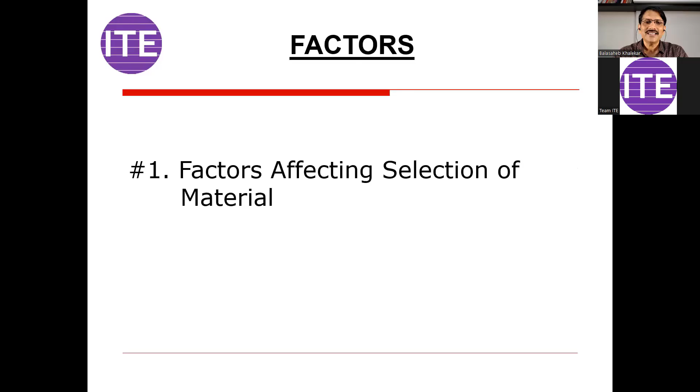So the first point is strength. As a design engineer, you have to visualize the various types of failures. For example, I'll give one example: suppose you are in the tool design department and you have to design a tool like a plastic mold.

That plastic mold is mounted on the machine plate, so you have to design some fasteners, like the size of the screw or bolt. So which type of failure will be there? For a bolt, it will be a shear failure. So when selecting the right material, you have to visualize and understand the type of failure, and as per that, select the material as per the required shear strength. Shear failure means shear strength.

Similarly, you have to visualize the functioning of the part and then decide the strength of the component. So when you select any material, you must know the various properties of material, like tensile strength, compressive strength, shear strength, torsional strength, and so on.

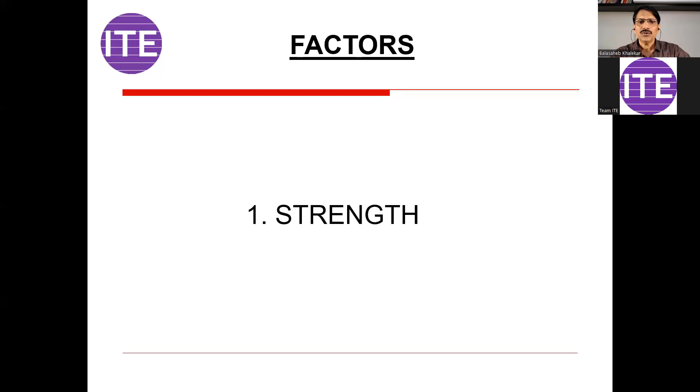Coming to the second point, accuracy. As a product design engineer, you have to finalize the tolerance value or accuracy. There are three terminologies: accuracy, tolerance, and quality. They are very similar in nature. So if the accuracy you want is say 5 micron, then you have to select a suitable material.

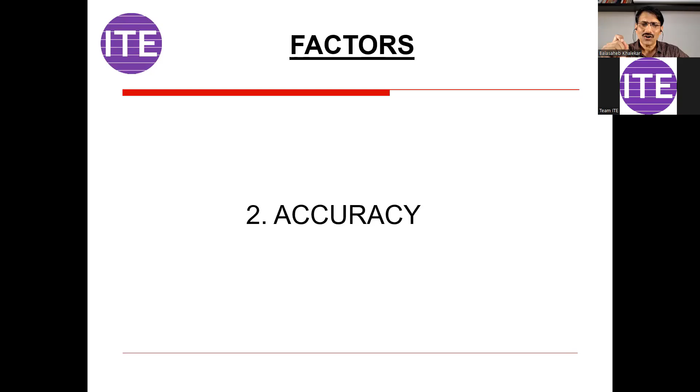You cannot go for wooden material or thermocol material, even though they are engineering materials. There are many materials available, so in such cases, if you have to go for 5 micron accuracy, definitely the choice will be steel or aluminum, meaning metals.

Then coming to the third important aspect, as Taufik explained, cost. And cost should be a parallel thinking. Here I want to give you one very important interview question, you can note it down: how will you reduce the cost of my product? That is a general question asked during interviews, and there are many answers to this question.

One way to reduce the cost is to change the material of the component. You can change the process, go for simplification of design, minimize the number of components, even delete a component, or change the thickness or size for a compact design. There are so many aspects to how you can save the cost of your product.

And cost should be a parallel thinking, meaning whatever activity you are doing right now, whether as a product design engineer, quality engineer, or production engineer, always think how I can reduce the cost of my product. There are various ways, so give this benefit to your company and ultimately to the customer, and don't think about how much effort you are putting in. So cost is a very important aspect.

If you are not sure about the cost, today I'm going to share the rates and the current market situation with you. You can take help from a purchase engineer, since he is there in the market every day. So before finalizing your drawing, go to him, show your drawing, and ask if the specified material is okay. He may give you a good suggestion, saying don't provide this, there is cheaper material available in the market with the same quality or strength.

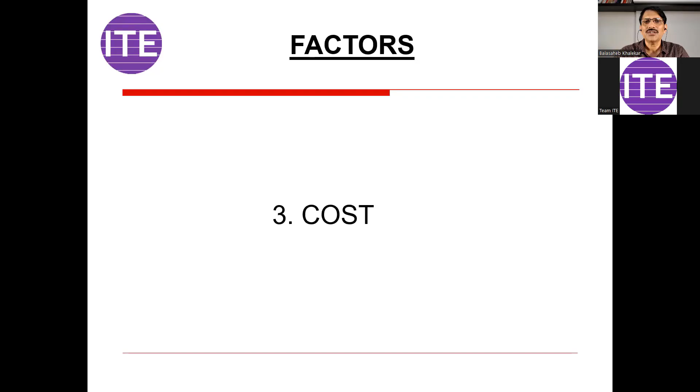Coming to the next point, that is quantity. How many components you want to produce? As per that, material will change. If you are in R&D and have to go for prototype activity, meaning you are not sure about the finalization of the design, you can go for a soft tooling material. In case of dies and molds, there is a concept called soft tooling. If the design is not freezed and trials and errors are required, you use soft tooling material and conduct trials. If found okay, then you finalize the design and tooling. So as per that, you have to go for different materials.

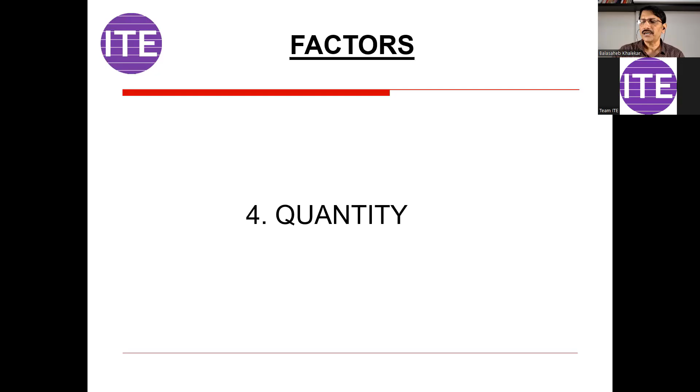Coming to the next point, that is complex geometry. Why is this point very important? When you are designing a product, how you provide the shape is as per the function and the requirement of your customer. There are various aspects of design. Sometimes you may have to go for a complex shape, like in case of engine head, manifold, gearbox housing, or engine block. The shape has to be critical because there are so many functions you have to achieve. And when you design your product, there should be parallel thinking about how you are going to produce this component. So if the complex part is there, then as per that you have to select the material.

And there is again a wide range of materials. So if the complex geometry is there, like engine block or engine head, then you have to select the material which can be processed further. There are many points you have to consider simultaneously. One thing is that you are selecting the material, but at the same time you should have visualization of how you are going to produce this component. That point also we are going to study right now.

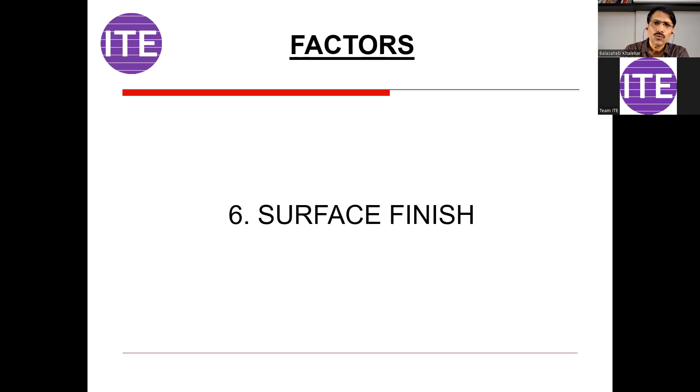Next point is surface finish. What is your requirement? If the component is aesthetically very important, you may have to go for triple triangle or even 4 triangle surface finish symbol. So if you have to achieve that symbol, the same material should be selected which will produce that surface quality. In case of steel, you will get better surface finish compared to cast iron. Even aluminum is better than cast iron. Then cast iron is better than rubber, for example, and rubber is better than wooden. That way you have to consider the point.

Coming to the next point, that is size of the part. Imagine the size of the part is say 2 gram or 3 gram, then there are some limitations for the material to select. Again visualize the job size of say 10,000 mm, then again the material limitation will be there. Not all component materials can produce such huge components. So that way limitations also you have to consider.

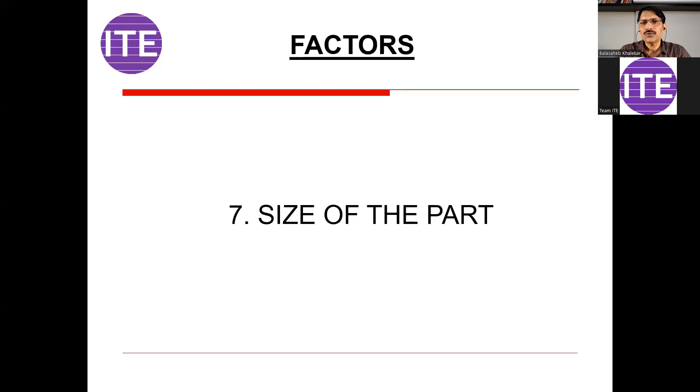Coming to the next point, machinability. Now this part is related to machining processes. So if you consider cast iron and steel, which is having better machinability? Can you type in the chat box? There are many design engineers I can see in this room. If you have to machine cast iron and steel, which is giving more machinability? I want to see your answers.

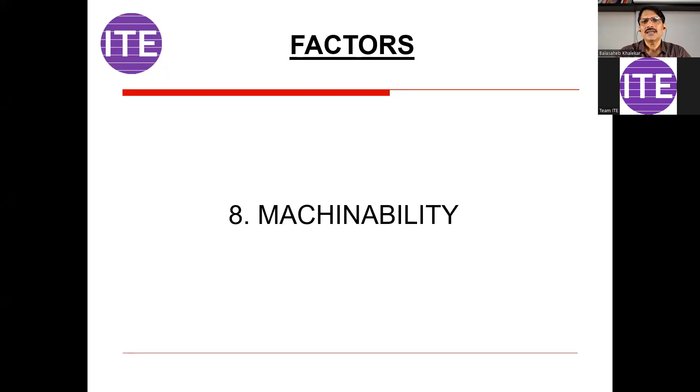Yes, Kunal, absolutely correct, very nice. Thank you, Alok. Thank you, Ashim. So machinability you have to consider. If machinability is good, that means your machining time will be reduced and your cost can also be reduced. That way we have to think.

Coming to the next point, ease of manufacturing. Ease of manufacturing means DFM, design for manufacturing. Here I want to give you an example and you can answer this question. Imagine there is one plate, the material is say steel material, and there one cavity you have to create. The length of the cavity is say 10 mm, width is say 2 mm, and depth is say 7 mm. So how are you going to manufacture this?

Can you type in the chat box? There is one plate, the length of the cavity you have to create is 10 mm, width is 2 mm, and depth is 7 mm. So how are you going to create that cavity in that machine plate?

Alok says drilling, Kunal says milling, laser cut, Vinay says milling. Okay friends, nice attempt.

But friends, just imagine when this is the cavity, if you are going for drilling, what is the minimum drill bit size you can get? That machining knowledge you have to acquire. And why I'm telling you this is because I want each one of you to work in the industry independently, without taking help from anybody. The day you achieve this, you will not remain a design engineer, you will become a project leader, you will become a manager. If you show ignorance in the company, people may take undue advantage.

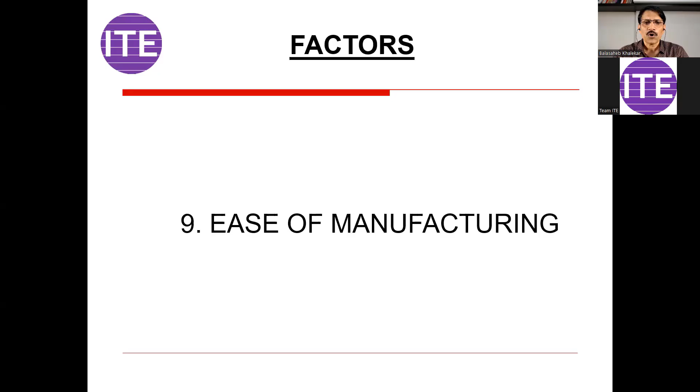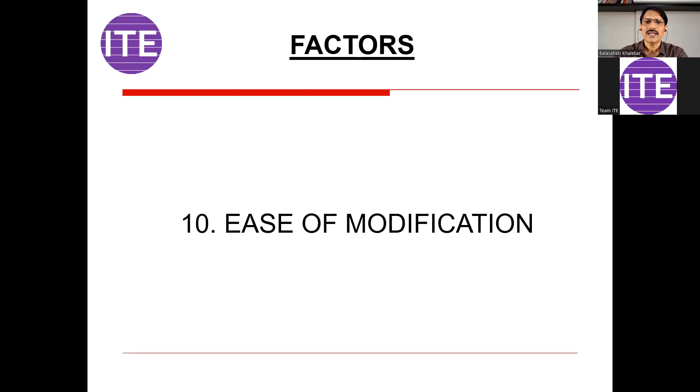Next point is ease of modification. As a design engineer, you must have observed that many times changes come as per the customer, or sometimes because management is not happy with the design. When you have to change the design, whatever material you select should have the flexibility to accommodate those changes in the same parent body. If not, you may have to go for insert fitting, welding, or other processes which may not give a proper feel, and the customer may not be happy. So you have to select a material which has that flexibility.

Next is weight. Sometimes weight is a constraint for the functioning or capacity. For example, a machine can handle only a particular weight of the component, so in that case you have to change the material. Another example is a car: over the last 20 years many components are using lightweight materials, even carbon fiber, as we explore different possibilities. The reason is that reducing weight gives a benefit to the customer, because fuel economy improves, or the cost of the product is reduced.

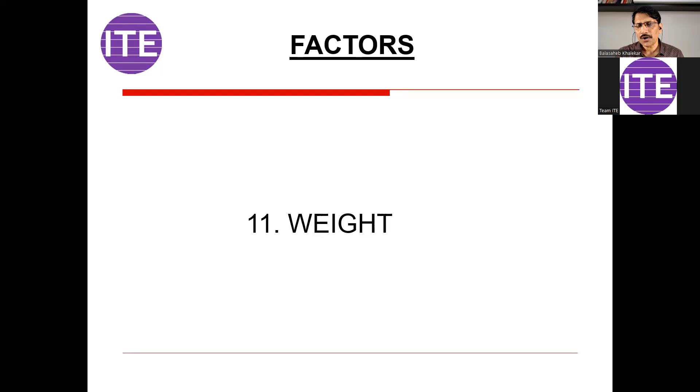That is the benefit. Next is the life: what is the life you want to achieve? This is one input for a design engineer when designing any product or tool. If you don't have this input, you can ask your customer what life they want. As per that, your material selection will change.

Next point is availability. This is not a technical point, but you have to consider it. Sometimes you attend seminars or webinars and learn about a material, and when you apply that on the drawing and release it, the purchase engineer will say this is not available in the market. So when selecting material, always cross-check with market availability.

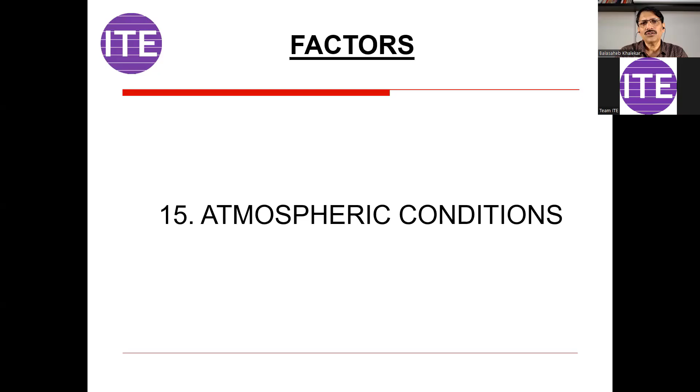Next point is working conditions: what is the temperature, what is the pressure, what load is coming on that particular product? As per that, you have to go for the right material. If the temperature is very high, there will be limitations for plastic or rubber material. Also consider atmospheric conditions: if you are designing a car, you have to consider various temperature variations, since that car can be used in Jammu and Kashmir, Rajasthan, or Tamil Nadu, or sometimes you are designing a vehicle for export quality. So as per that variation, you have to understand the effect on the material and select the suitable one accordingly.

Next important point is manufacturing process. Very important - when you are designing a product, there should be parallel thinking about how you are going to manufacture this component. For a particular material, I can show you this with an example. I have one component with me, made of aluminium. Can you type in the chat box how this component is manufactured, what is the manufacturing process? I want to see your answers.

This is the component you want to produce. This is a manifold of a two-wheeler. Let's understand how this component is manufactured.

Yes, Nilesh, absolutely correct, very nice. Thank you, Alok, absolutely correct. Yes, Vinay, awesome. Anil Kumar, perfect answer.

So this is produced by die casting process. If you say casting, there are many processes available like die casting. In die casting there are processes like low pressure die casting, high pressure die casting, gravity die casting. Again in casting there is sand casting also. So out of all these processes, which is that specific process? That is die casting, right?

In die casting also, there should be a precise answer. So this component is produced by gravity die casting process. Very nice, thank you for this.

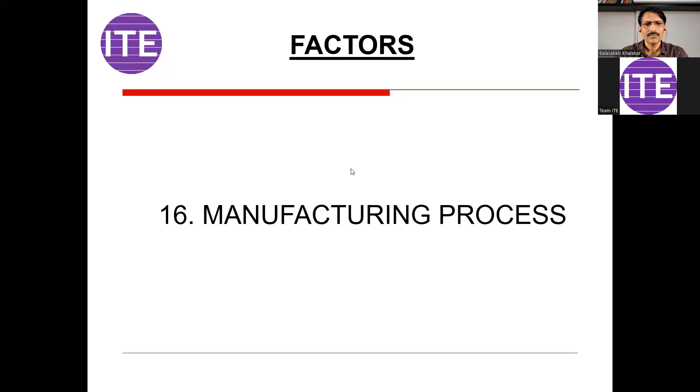Let us understand other aspects. This is one important aspect I want to explain to you. You have to just focus on 5 materials, that's it. Whatever field you are working in right now, as a quality engineer or production engineer in automotive industry or tooling industry, just focus on these 5 materials.

What you have to study, you start from the density of material, for example. Here's an important question generally asked during interviews, you can note this down in your notebook. Draw one cube, dimensions 100 mm by 100 mm by 100 mm. Material is cast iron, density of cast iron is say 7.2 gram per centimeter cube. Find out the mass.

Drawing I have given, that is a cube. Material I have given, find out mass. This is a frequently asked question during interview, and not just for interview. In day-to-day life you have to find out the mass. Of course softwares are there, but if you are not in front of your software or computer, you are at remote places, you should be able to do this activity right from raw material procurement up to dispatch. This is one element which is very, very important.

So why only 5 materials have I specified? Take any industry, say for example car manufacturing company. Just visualize the body components. Body components are produced from steel material. Dashboard of a car, the material is plastic. Tires, oil seal, belt, the material is rubber. Piston, clutch housing, gearbox housing, the material is aluminum. Engine block, material is cast iron, right?

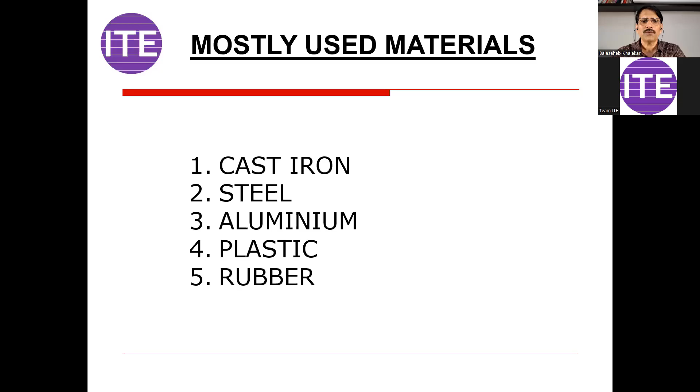So one by one we'll understand this. First material is cast iron. If possible you can note down all these aspects. I will not prefer you taking screenshots. Why is it like this? Because when you take a screenshot, there's a high probability that you will not see that after this webinar. And when you write this - writing, one time writing means 10 times learning. That is the ratio we understood in our school days. So the same thing applies here.

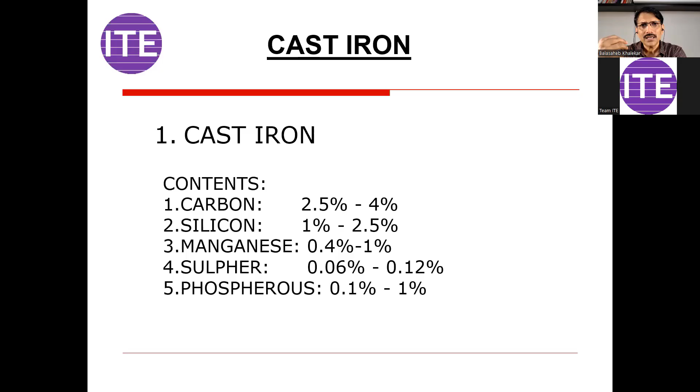So carbon percentage 2.5 to 4%, silicon 1% to 2.5%, manganese 0.4 to 1%, sulfur 0.06 to 0.12%, and phosphorus 0.1% to 1%. Now this may change slightly, this is just to give an idea about the contents. So you must know which are those important elements in cast iron. And at the same time, suppose if you add phosphorus in cast iron, which properties you are going to achieve? If the content is changing, that knowledge you must have.

Then basic requirements like various strengths - ultimate tensile strength, this is the range, then compressive strength, shear strength, and hardness. Hardness is in BHN. Here one thing is important - you must know what are the various inspection methodologies. So if it is a cast iron component, the hardness is checked in Brinell Hardness Number. And most of the time for steel, it is checked in terms of HRC, that is Rockwell Hardness C scale. And for cast iron, compressive strength is more than tensile strength.

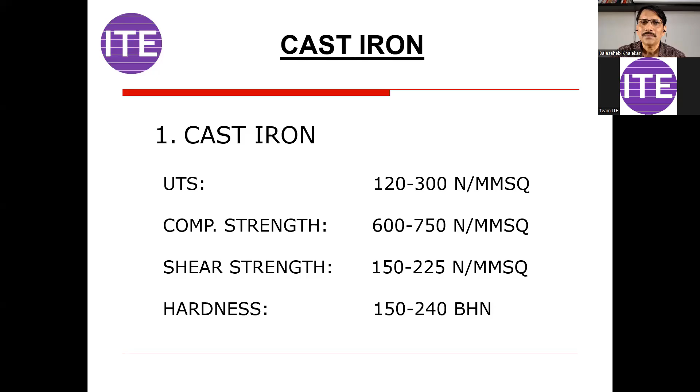Then you must know the applications where cast iron is used, and the types of cast iron. One is gray cast iron - the most commonly used cast iron is gray cast iron. Spheroidal graphite iron, means SG iron - this is also called nodular cast iron. And what is the difference here?

See, one side this is cast iron and this is steel. Steel has high tensile strength, cast iron has less tensile strength. Steel has poor castability property, cast iron has good castability property.

Now in between is the SG iron, that is spheroidal graphite iron. Why is it called spheroidal graphite iron? Because the carbon is in the form of spheroids, and this is also called nodular cast iron. So SG iron has better castability than steel, but poorer castability compared to cast iron. So SG iron material is used when you need complex geometry, or applications like vibrations or impact loads - for all these components, the material is SG iron.

This is again one important question generally asked during interview.

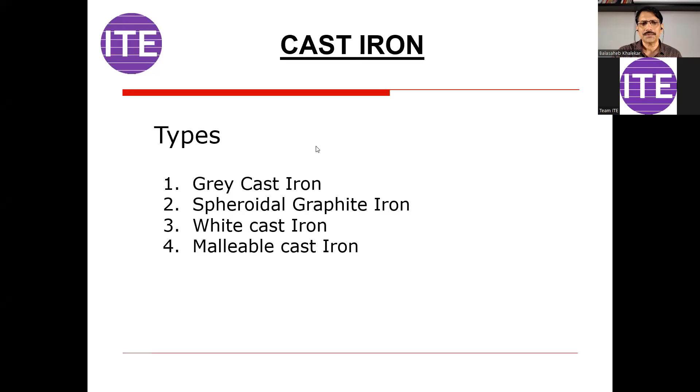So these are the major types of cast iron. There will be other types also, but in industry, practically most commonly used, these are the types. Coming to the advantages.

If you are using cast iron, what is the advantage? Number one is low cost. If you go to Kolhapur or Belgaum area, you will find many foundries and you get the casting at the rate of raw material also for simple components.

Second is excellent castability property, meaning it can get any shape. You can create any complex geometry because of this property. Good machinability, good compressive strength, available as per the requirement. That means, what is your requirement - shape and size?

You can get that material unlike steel. In case of steel, whatever is available in the form of size, you have to purchase. But for cast iron, you can get the material as per your required shape and size. Intricate shapes are possible, yes, because of the flexibility of the process.

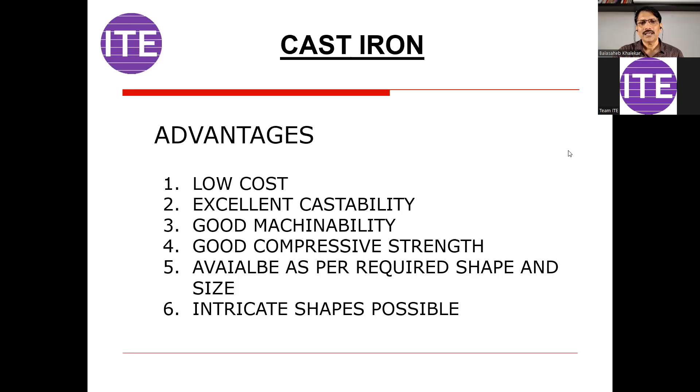But at the same time, we must know the limitations of this material. If you are using cast iron, you have to be very careful that this is a brittle material, so careful handling is required. Low finish compared to steel means by just appearance you should be able to visualize the material - you will find that cast iron surface finish is poor compared to steel.

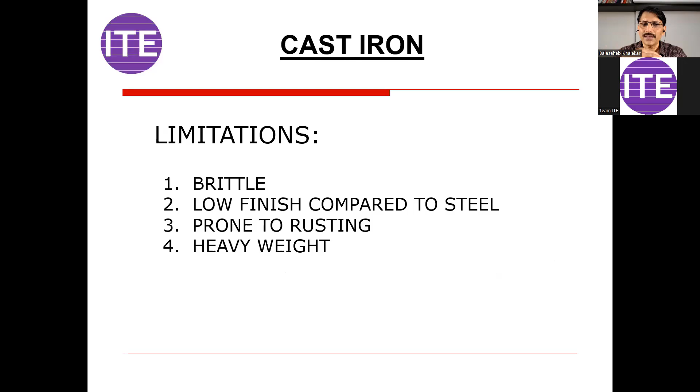Prone to rusting, yes, so careful storage is required. And heavy weight means if you want to go for some applications, you have to consider this point, that conventional processes may not be suitable.

Next, applications: engine block, engine head, gearbox housing, clutch housing - these are the automotive examples. Other examples like machine beds and fixture frames, cast iron can be used.

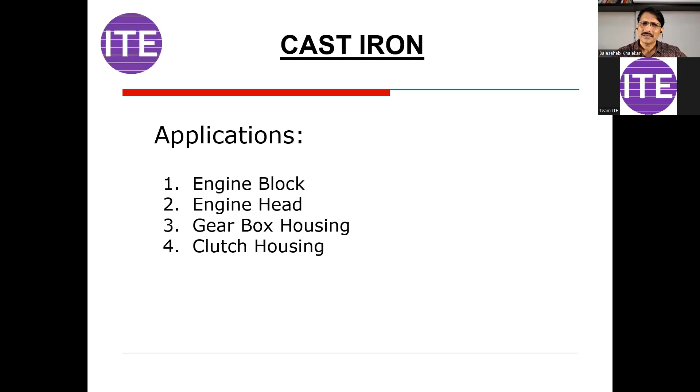Next important material is steel, and you have to master all these materials, friends. I told you, you have to start from the definition of material. Then you must know the various properties of material, like ductility, malleability, toughness, resilience, hardenability. Then you must know the alloying elements of each material - carbon percentage, iron percentage, silicon, manganese, sulfur, phosphorus. And then application. These are the main areas where you have to focus.

Then this is one very commonly used question asked during interview: what is the difference between cast iron and steel? And these are the important points you have to share. One is carbon percentage - so can you type in the chat box, what is the carbon percentage in steel? So the range is from 0.03 up to 1.2%.

And as per the carbon percentage, there are three types of steel: low carbon steel, medium carbon steel, and high carbon steel. Low carbon steel we also call mild steel, right? So mild steel percentage is up to 0.3. Medium carbon steel 0.3 to 0.6, and high carbon around 1%, that is above 0.6% - that is high carbon steel.

Then types of steel and cast iron - what are the various types? That is one point you have to mention. Then raw material availability - as I mentioned, for steel you have to be dependent on the market, but for cast iron you can get the desired size and shape.

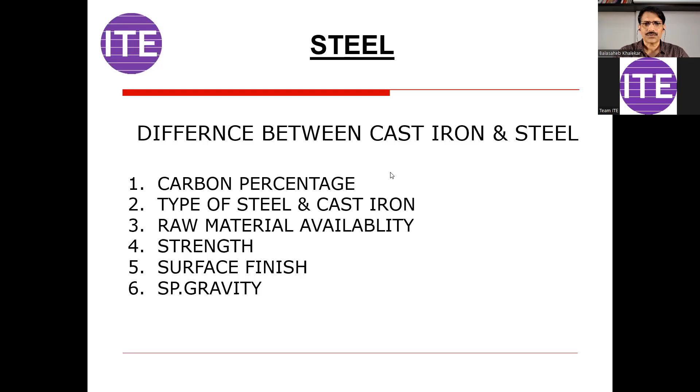Then strength: in case of steel, it has high tensile strength, but in case of cast iron, it has high compressive strength. Surface quality - steel is better than cast iron. And specific gravity - 7.8 for steel, 7.2 for cast iron. Next, then types of steel, broad categories.

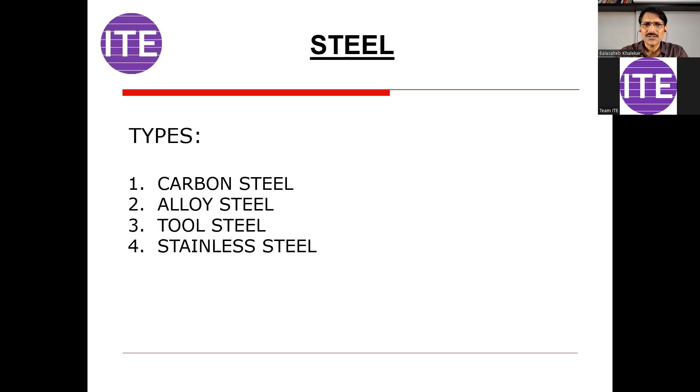It's a huge subject, but general application, carbon steel. In that, three categories: low carbon, medium carbon, and high carbon. Alloy steel, huge area. Tool steel and stainless steel. These are the main types of steel, but there may be many other types like spring steel and other steels available.

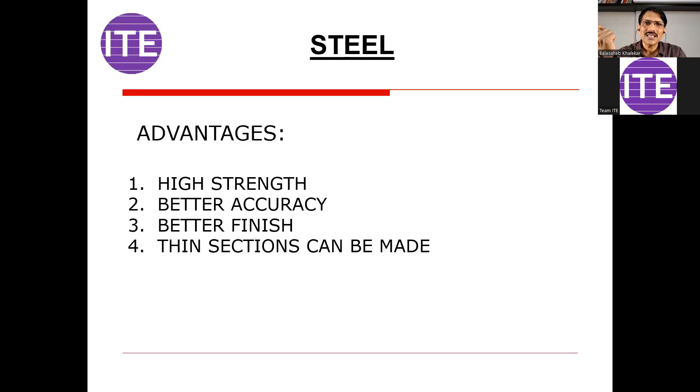Advantages: if you are going for steel material, high strength, better accuracy, better finish, thin sections can be made. This is one requirement of a product, that when you are designing a product, you must understand what is the minimum thickness you want to achieve. There are very few processes which can produce thin sections. That is one capability you have to consider. So in case of cast iron, that is not possible to produce thin sections, which is possible in steel.

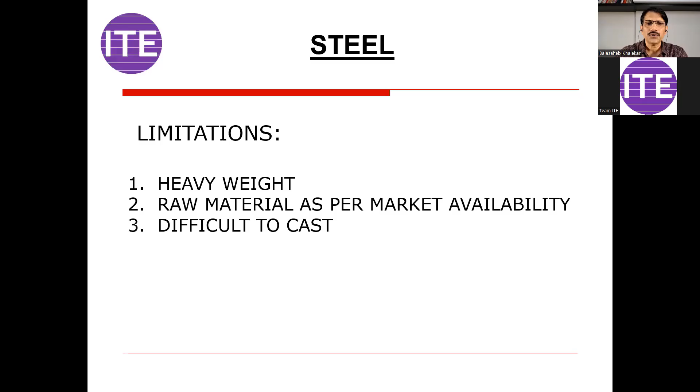Limitations: again, heavy weight, raw material as per market availability, and difficult to cast. Casting means steel can be casted, but there are problems while solidification of steel. So many times there are some defects in steel, but still we can produce the casting of steel, but not like cast iron.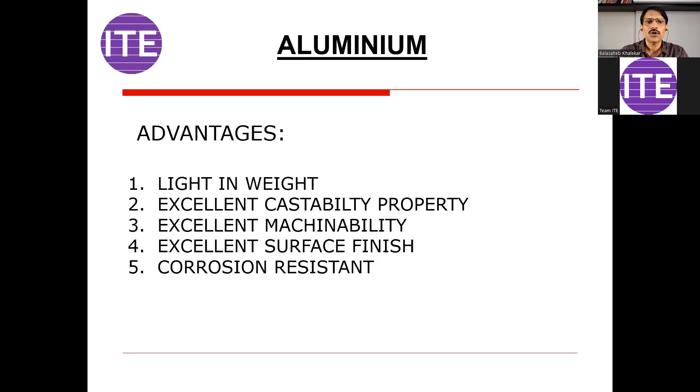Then excellent machinability - it is very smooth for machining. Excellent surface quality, better than cast iron, even steel. Corrosion resistance - it is not affected by the atmosphere. And when we say lightweight, many components nowadays are being replaced from steel to aluminium, cast iron to aluminium, because of this important aspect.

Limitations: less strength - yes, even though other benefits are there, but when the point comes to desired strength, aluminium will be second or third. Soft material, so careful handling is required. Then high cost - cost of aluminium is very high compared to steel and cast iron.

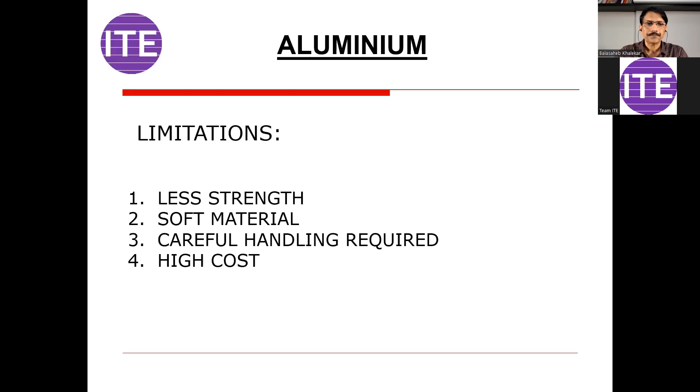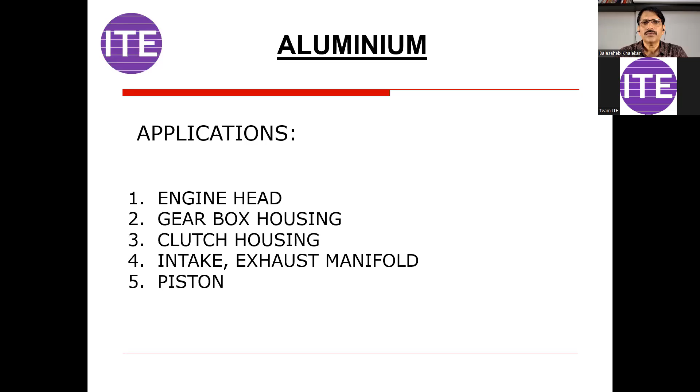Applications: engine head, gearbox housing, clutch housing, intake manifold, exhaust manifold, piston. Other applications like air conditioning of a car, radiator parts. There are so many brake components, various tanks. Even in case of various pumps, you can go for aluminium. You can go for other components like parts of refrigerator, washing machine, home appliances.

Then next important is plastic. There are two types of plastics: one is thermoplastic and another is thermosetting. The basic difference here: thermosetting plastic cannot be reused, but thermoplastic can be reused. And most commonly we are using thermoplastic material.

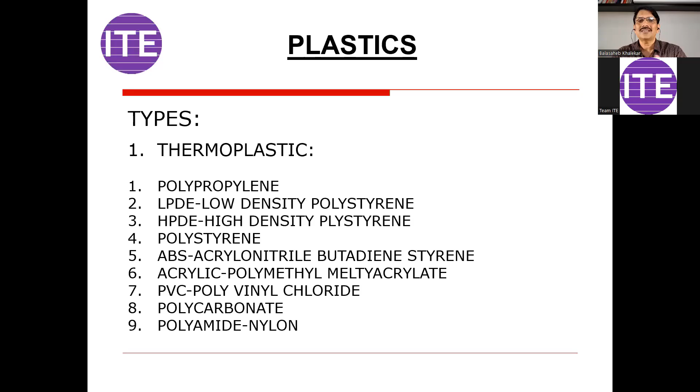What are the various types of thermoplastic? You can see on the screen: PP polypropylene, LDPE, HDPE, polystyrene, ABS, acrylic, PVC, polycarbonate, polyamide, nylon, nylon 6, nylon 66. So many materials are available in the market.

And another type is thermosetting plastic, with types like alkyds, urea formaldehyde, phenolics, epoxies, melamine. You can see the application of this - thermosetting plastic, one application, electric switches. You must have seen that if some sparking is there or some problem is there, the appearance becomes blackish, right? So it cannot be reused, that we can understand.

Same way, when you say thermoplastic material, what is the process? And when thermosetting, what is the process? There are some definite processes where you can produce these components. That limitation part also you must know.

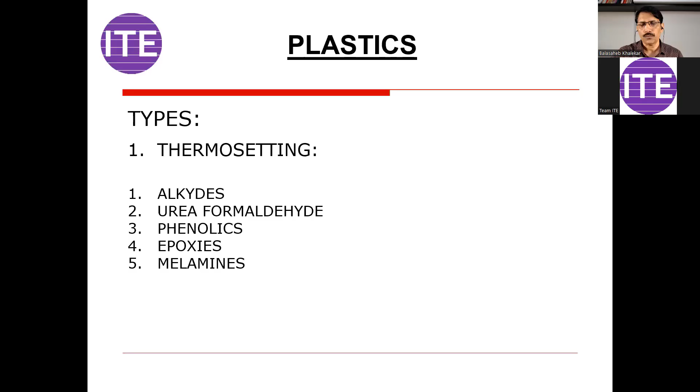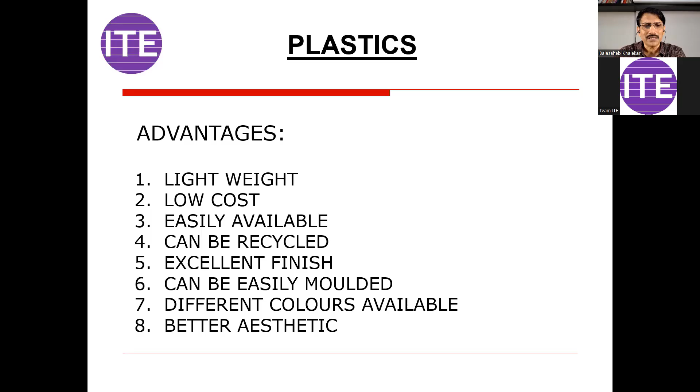Advantages of plastic: light in weight, low cost, easily available, can be recycled, excellent finish, can be easily molded, different colors available, and better aesthetics.

Limitations: less strength, not suitable for hot conditions, like if you are designing a car engine components - because of these temperature conditions, you have to be very careful and a conscious decision is required. Less accuracy - compared to what? Compared to metals. You may say that accuracy of plastic we can achieve in microns - yes, that is possible. But again, when you consider 8-hour production, what is that regular accuracy you are getting? That accuracy we are mentioning here. So very few times you are getting that accuracy.

Then disposal of plastic is a tedious job, meaning it requires many years to decompose. That's why it is not environment friendly, not good for health. You must have seen that there are bottles - at the bottom of the bottle, there are numbers, and as per that number, whether it can be reused or not, that we have to decide.

Difficult to produce complex geometry. You may not agree with me, you may say, okay, we can produce any complex geometry, but you have to compare this with components like engine block or engine head. If you compare with that, plastic cannot produce very complex parts. Yes, to some extent, we can produce complex geometry.

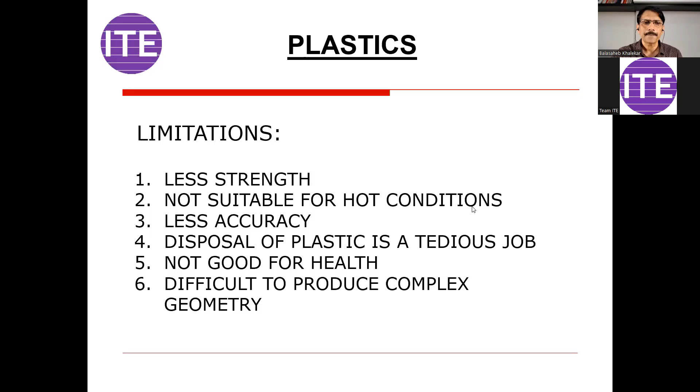Now here's the criteria we have to understand: selection of material as per the product tolerance. Initially, we understood the various factors.

Now when you consider all these materials, if you want to go for a very good tolerance value, better accuracy, then aluminum and steel are better than cast iron. Again, cast iron is better than plastic. So as a design engineer, you have to have that ranking of which is better.

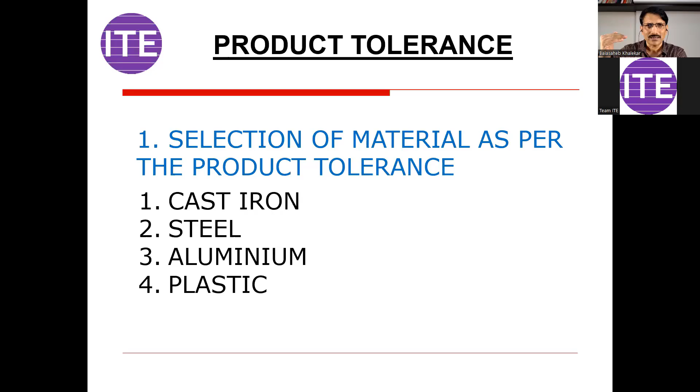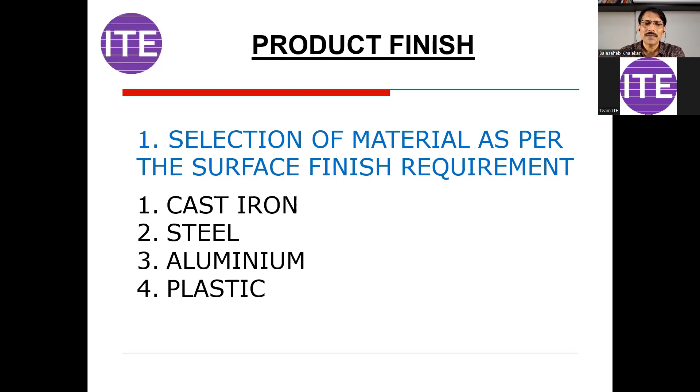Coming to the second point, that is as per the surface finish. If you want to go for a good surface finish, even plastic is better, aluminum is better, steel is better than cast iron. Then cost.

You must know the costing part that I'm going to share right now. So understand this, cost is in terms of what? What is the unit of that? Cost can be per kg, cost can be per square feet, cost can be per cubic meter, cost can be per liter. So what is that criteria that you must know?

In case of cast iron, if you are procuring the material, it is in terms of kg. So for most of these materials, the required product cost is in terms of mass, that is kg. But at the same time, when you are processing that, the costing is changing because you are processing it. So raw material, then process, then the output. Raw material may be in terms of kg, but when you are processing it, then it may be per piece rate, or per square mm, or square centimeter, like that also.

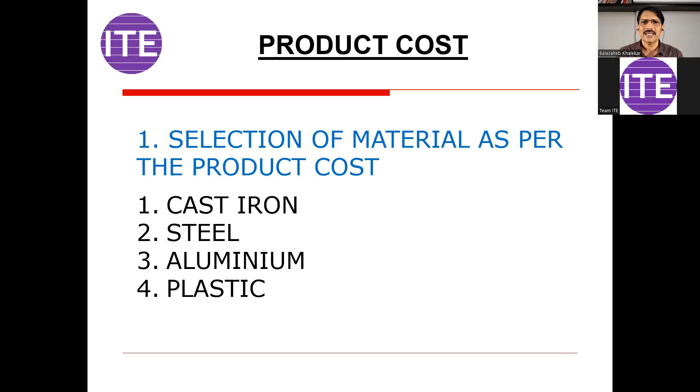Next is selection of material as per the process. I told you, when you are designing a product, the next level of visualization is how I am going to manufacture this component. If it is cast iron, very few processes are there, like you can produce the component by casting process. But for steel, you have better choices. Steel can be produced by casting, forging, rolling, extrusion, machining. Various aspects are there.

And steel has a wide range. So apart from that, which is the better solution as per the particular aspect, that conscious decision you have to take while deciding the right material. Then if you understand aluminum, aluminum can be processed by sand casting or die casting. Then plastic can be produced by injection molding, blow molding, rotary molding, compression molding. There are again various types of processes.

And if you have this choice, then whenever you release the drawing, there will not be any modifications further. That is the number one performance measure of a design engineer. What is that?

In good companies, when you complete one year of working, HR has their policies, they will give you an appraisal form. As a design engineer, the number one performance measure is first time right design. Meaning, whatever activity you are doing, like releasing the drawing or releasing the model, there should not be any modifications afterward. There should not be mistakes in your design. That is related to quality.

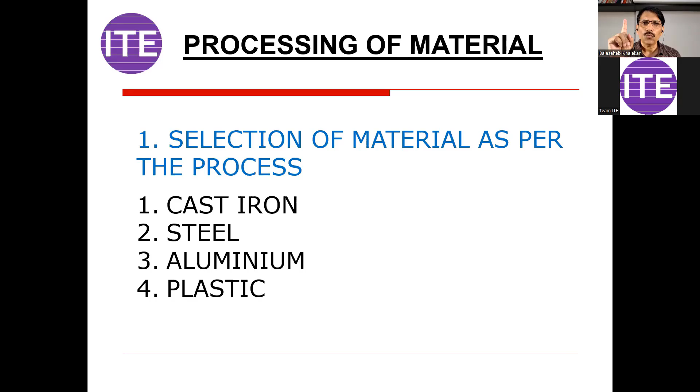So I was telling you that when you select the component, after that, there should not be any changes, otherwise the cost will be very, very high. For example, if you want to change the process from sand casting to die casting, the total tooling will be changed. So it's a wastage of total tooling, and a single tooling cost may be in lakhs of rupees. If you consider the tool cost, it can range from 2 lakh rupees to 10 lakh rupees for a single component, and the cost of the tool may be 1 crore also. So this is a major decision.

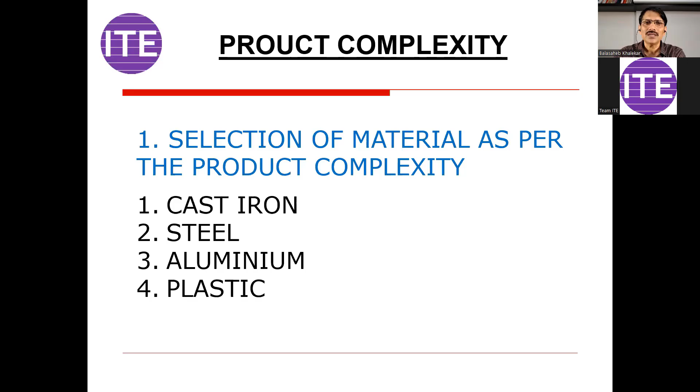Next is selection of material as per the complex geometry. I told you, for aluminum and cast iron, there are no limitations. You can go for any critical shape, but there will be limitations for plastic, and to some extent for steel. Next is material cost. I told you this is changing every day.

It is changing and you should have a better idea about this cost, not only for design activity, but if you are an entrepreneur, you have to understand the effects of inventory and other things, because this is a very volatile market. Every day the market changes, so the cost changes there.

So for cast iron, if you consider the situation before COVID, it was almost half the price, meaning 45 to 50 rupees was the cost. Now it is more than 80, 85 rupees. For steel, it is even 200, 250, 350. For imported materials, even 800 rupees per kg is available, depending upon the composition of material. For tooling material, it may be even higher. Aluminum's general cost is around 270 to 350 rupees per kg. This is today's situation, and it may slightly change as per the city also.

Then plastic material, raw material, is in the form of granules, and as per that, you have to add some elements in that. Sometimes people also recycle the material and add that in the particular raw material. But when you are mixing that, if it is above the suggested percentage, then it may affect the quality of your product.

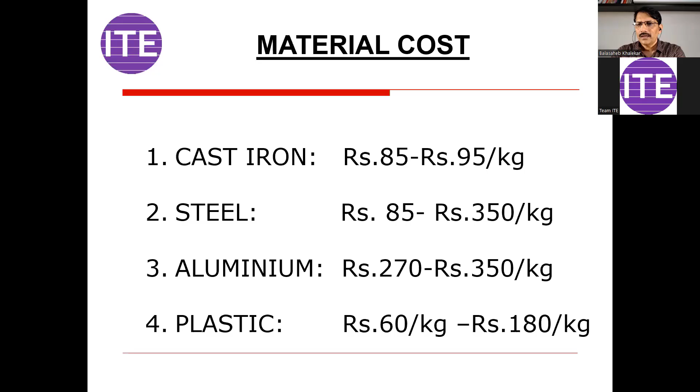Next, die material. Now we understood the product materials. This is one important area, the tool design area, because most components, like car body components, are produced from press tool operations. So here you need to go for press tool dies. There are various types of dies, like forming die, drawing die, blanking die, piercing die, trimming die, and for that, die material is required.

And for plastic components, plastic mold, different materials are used. If it is an engine block casting, you may have to go for cast iron material, so you go for sand casting. For sand casting, the tool name is pattern. For rubber, it is a rubber molding process, so a rubber mold is required. For forging, it is a forging die. And for die casting, it is a die casting die.

So die and mold are very similar terminologies, but you have to use the correct terminology. If you say plastic die, that means you are not from the plastic mold industry. And if you say forging mold, again, you are not from the forging side. So people will recognize you or understand you from your background and the terminologies you are using.

So here die material is very important, because if you consider 10 lakh rupees as the cost of the die or tool, around 35 to 40% of the cost is contributed by the cost of the die material. And this is a very conscious decision you have to take.

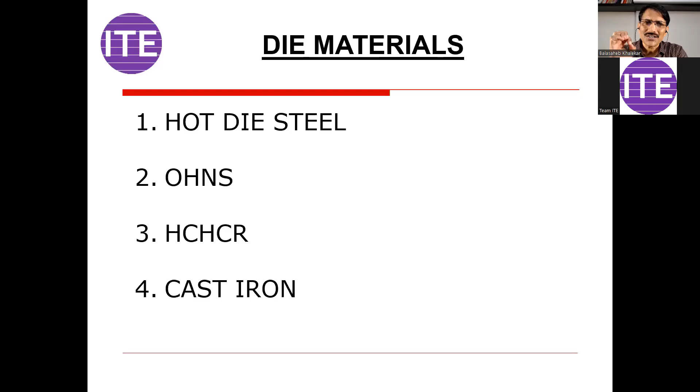So these are two aspects: one is product design, that is number one, and second important is tool design, that is number two. But if you want to become a good product design engineer, you must know tool design. You must know the limitations of these toolings or the process parameters when you work in the tooling area. And when you are working in the tooling area, you will understand the various concepts of tooling, like one important concept, parting line, which depends upon various aspects, and is also related to material selection as well as your product shape and product material.